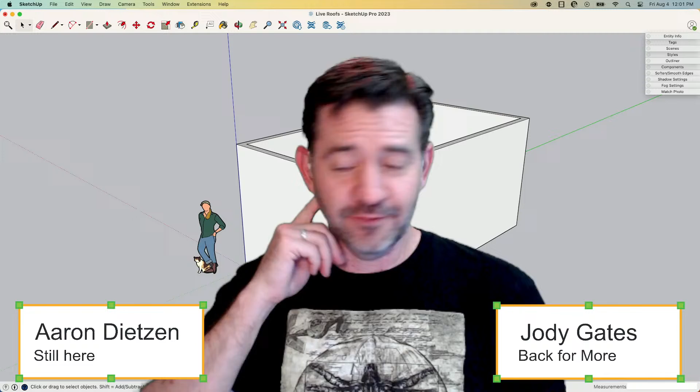Hi everybody. That's my favorite thing about remote work, the constant talking over each other. No, you go first. No, you. You'd think we'd have that worked out by now. I can't actually see Jody's face, so I'm missing half the cues of communication, only being able to hear him, just like you guys. So that's why we're stepping on each other.

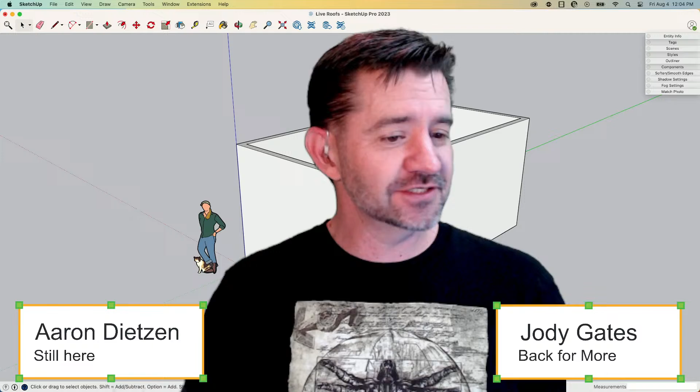I'm gonna be honest, I'm a little bit confused because I thought it was titled Pitch Perfect Geometry or modeling, and I thought it was going to be a musical show. I have all this music queued up and now it's wasted. Oh hey, you want to start singing, Jody? I'll pause the modeling, or maybe I'll just throw some out there. Let's be clear, when it comes to me and singing, Pitch Perfect is not the appropriate word choice. Jody's more of a freestyle rapper, is what he's saying folks. That's right, interpretive, I'm an interpretive artist.

All right, so let's hop in, let's do this thing. We're gonna get into this, I created some simple geometry here to represent walls, I just created a whole bunch of boxes of different shapes and sizes. Can I stop you first for a specific ask? Fire away. Peggy would like to see that shirt a little better.

There's my Vitruvian man. That work? Something about it looks like there's some motion blur around his arms, so to me it looks like he's flying.

I think the issue is it's kind of yellow, it looks like old paper, and I think the green screen is picking that up a little bit and giving me some gray in there. So there probably is a little bit of flicker around here where there's lots of lines and stuff.

But yeah, in the real world he's sitting still. But yeah, we can do that in the real fake world. That's right.

Okay, so I'm seeing mansard, I'm seeing mansard roof, I'm seeing A-frame. Randy would like to see a roof in D sharp or a G flat. Nice way to take that A to another level.

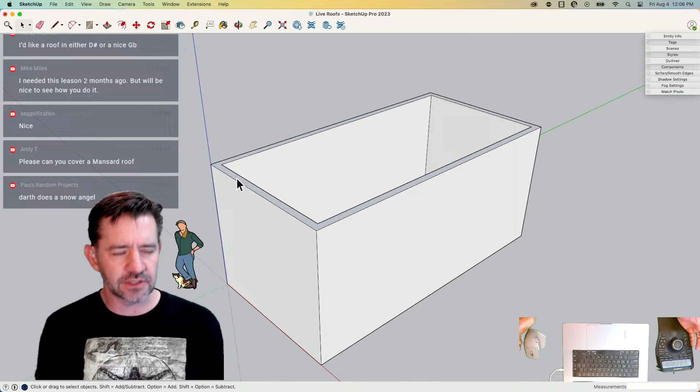Generally speaking, if I go in and model something for design or framing or anything like that, the wall thickness I will use is the framed wall. This comes from my background where it was design, so the bearing width was what I was concerned about. I wasn't concerned about the finish of the exterior or interior, where this will end up being 6.5 inches total. For me, the studs and plates were going to be 5.5, that's what I modeled at. So that's what this is.

A big thing when I go in and model geometry on top of walls, the first thing I want to do is separate the geometry, right? So right here, this is all loose geometry. You can see, pretty simple - it's just a rectangle, did an offset push pull, got all my geometry.

I'm going to grab it all and make it a group before I draw anything else. This means when I come in and start drawing my roof geometry on top of here, it's not going to weld with the wall. That's pretty much the worst case scenario - having all of your stuff together. Then when you want to take the roof off, you have to go in and pick and hide individual pieces of geometry. That's not a way to do it.

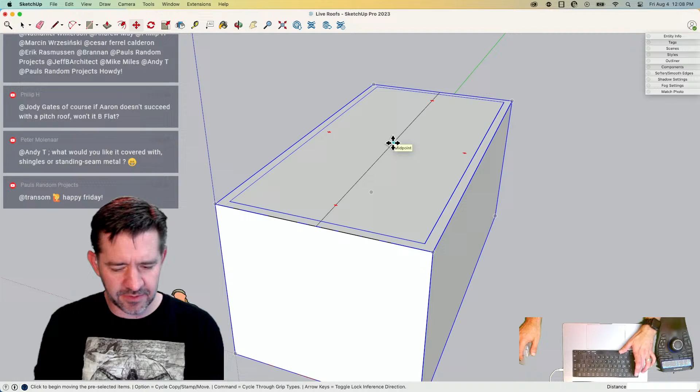The second thing, when we talk about roof framing, what I don't want to do - I'm going to pick on our own training materials here - is draw a rectangle, put a line right down the middle, and grab that line and move it straight up. We can close it up by going like this. And that's all you need to know. See you guys next week.

No. Done. The problem here is that this roof comes down to nothing at the end, right? And that's no good. No matter how I frame that - with trusses or sticks or some space age polymer, it doesn't matter what it is - if it comes down to nothing right here, nothing can't support a whole lot of load. This is not going to be a good way to do it.

So at the very least, what I probably want to do is something more like this. I would come in here - oops, missed the corner - go like that, give that some depth, probably a specific depth based on the heel of whatever member that is, if it's a stick or something like that. I think a standard heel height for a 2x4 truss at 6:12 was 4 3/16 inches.

It's extra fun when we do roof stuff since you have the background in roof stuff, so you can use real roofing words as opposed to other times where you just use a thingamajig and sound like you know what you're talking about, which is kind of new for me. It's kind of neat. I'm trying. I'm pretending. Yeah, I haven't had to make any terms up yet. I'll wander somewhere, we'll end up somewhere I don't know what I'm doing. I feel confident in that. Just less likely to - I'm going to make up less things than normal. Good. All right, good, I guess good.

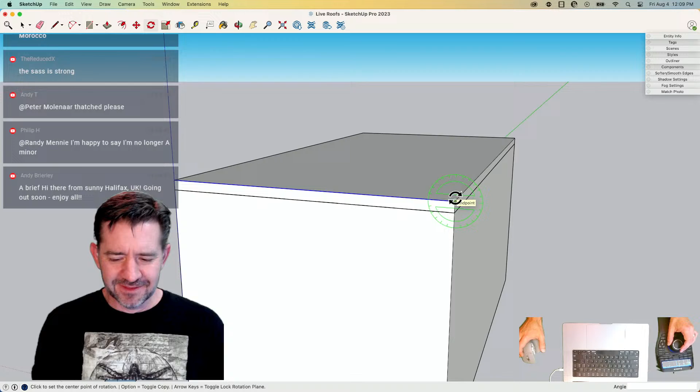So there's a couple things I could do from here, right? If I was a math guy - not a thing, not what I am - I could probably calculate what the heel height would be based on the span. So a span of 10 foot with a 4.3 heel height, the ridge is going to be a number. That could happen. I'm not that guy.

So what I'm going to do instead is I'm just going to grab this line right here. I'm going to go to rotate.

I don't know if I ever installed my keylogger. I said I was going to do that last time, but I still haven't. So I just use the shortcut key of Q to get that there.

I'm going to take this, option rotate. By default, rotate is asking you to put in an angle, pointing in the right direction down there at the very bottom, underneath my keyboard. The default it's asking for is angle, but you don't have to put an angle. You can actually put in a slope.

In the US, slope is usually rise over run. So it's rise over 12 inches - how high do I go up? I'm going to put 6, then a colon, then 12. That's going to give me a 6/12 slope right there.

I'm going to grab this guy right here again, do the exact same thing, option rotate that to 6/12, enter, and that gives me two lines that cross - that would be a 6/12, 10-foot profile.

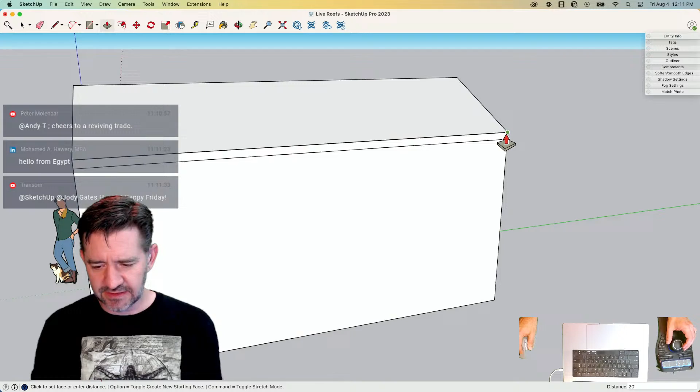If this was just a gable roof like this, I would just grab that, pull it right down like that, and that would be the start of my roof. From there, easy mode - we're done. Make group.

So that would be step one, the basics of how I would do all roofs. They would all start off with that basic set of geometry. Stuff's going to change, of course, with different slopes, and that's just going to change how far I go. I might have non-symmetric roofs where one slope's higher, but it doesn't really matter - when I'm looking at the end, it's just like that.

So the first thing that comes up is, well, what if we got a hip roof, right? What if this leans back right here? Let's hop right over - that's why I got examples, opportunities, examples for days here. So I would probably do the same thing, right?

Start with this shape, and give me that heel height. Then what I would possibly do here is maybe something like this: grab this shape right here, grab the actual face, not just the line, and I can option rotate that to 6/12.

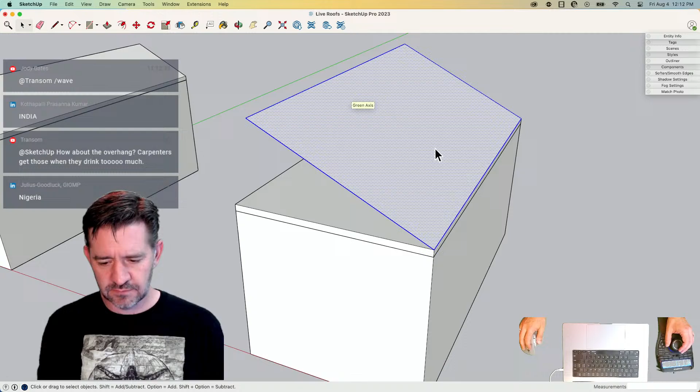I'm going to make that a group temporarily - you'll see why in a second. I can take this one right here, same thing, I can rotate that. Option, rotate that up, 6/12. And that gives me that initial geometry.

That is it. Transom had a comment about overhang - is that something you'll get into after a bit, or is there some natural part that comes with this? Yeah, we'll talk about how to add overhangs.

Generally speaking, well, I guess it depends on the roof. If I'm doing something like this, what I would probably end up doing is after the fact, come in here and drop my overhang on. So we'll come back to it, we'll do that.

For a hip roof, I guess I could do the same thing even. I could just grab this and then do the same thing - take this face, option rotate that up to 6/12. Nope, 6/12, there we go.

If I want to do all the sides, I could do the same thing. I do want to say that - oops, that's what I did, I did a semicolon instead of a colon, that's why I got a weird thing there. Something like that would work. Roofs can be messy, I'm just going to point that out right now.

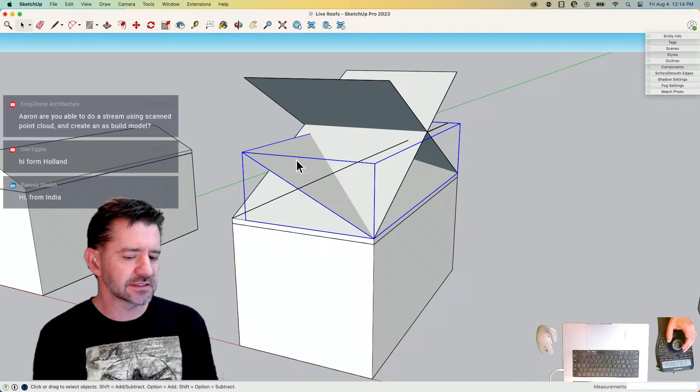But the nice thing about roofs is a lot of times you'll have the same pitch occurring throughout a building. So you can actually establish that pitch with one surface and then take that surface and put it in multiple places. That was one of the reasons I made this into a group right at the beginning - because I wasn't sure if I was going to have to grab that and copy it around. In this case, I didn't have to, so I can actually explode that.

Once that's done like that, I can do some quick intersection. Just grab all those planes, right click, intersect face with selection, and then I can just pretty much grab the top like this and delete it. And with that, you got a hip roof. So that's a way to do it.

That works really well if I have things like non-symmetric hips - so if the face is not 6/12, it's 12/12 or something like that. If I have something different, that's a good way to do it. Let's look - I am going to talk about overhangs. I want to keep going here though, because I want to show you guys another way that I could go about that.

Do the same thing here. I'm going to take this, just the edge. Transom approves of that, disappointed that he had not thought to use the rotating planes method before.

Hey, that's what I'm here for. If you had already thought of it, then you guys wouldn't need me. Aw. It's true.

So I'm going to rotate just that edge up. I'm going to find the middle of this side, drag that straight up, and I'm going to double click that and make it a group. Take that group and I'm going to stick it in about the middle. It doesn't actually matter where, just somewhere along this line. And then I can actually explode at that point. I don't need it to be separate. I just need to unstick it from the front.

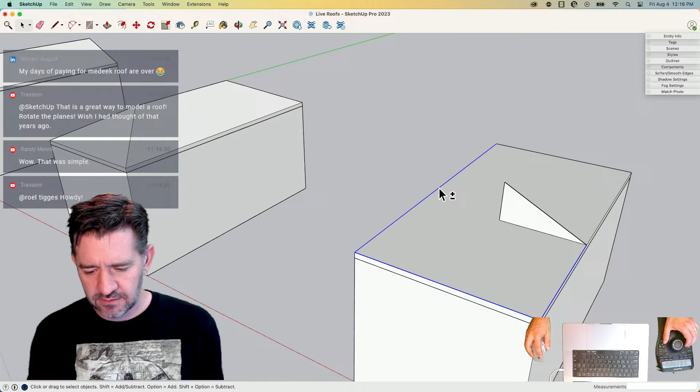And now if I grab all these edges like this, I can use Follow Me. Oh, which I haven't even added to my, oh, hold on. We got to get that up here. That's not going to work. Follow Me. I can say Follow Me and then hit this triangle, and that'll give me that same geometry.

That works really well. In this particular case, where it's a simple box, I can just take half of the standard span, model that, just do a Follow Me, whip it all around. That becomes a little more work when you have a footprint more like this, which we'll get to. But with this, yeah, Follow Me, have it go around, you're done. Make that a group. Let's back up.

You might have a real future in roof modeling. Hey. Design. Or real past. I got history. I got history, son.

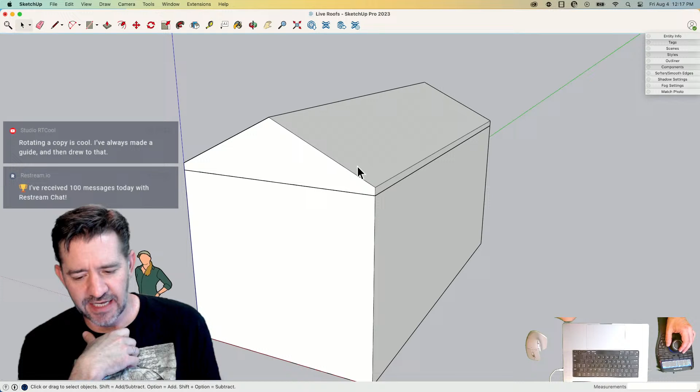Yeah, so when we talk about overhangs, it's really kind of up to you how you want to do it. Well, it's all up to you. We're just throwing out options. But overhangs can be added before or after. One of the things I run into with overhangs, and the reason I struggle with them personally, is it adds a bunch of extra geometry hanging down, and then trying to keep that clean as I model ends up being more work than I want to deal with. But we can do it. We can talk about it. Let's get into it right now.

I'm going to do this outside of context, so I don't have to worry about. Yeah, Nathaniel's on here. He's writing notes, and he's going to turn everything I do into an extension. And you guys won't have to worry about learning. I committed you, Nathaniel. Sorry.

So I'm going to do this out of context because I don't want my geometry to join. I want to create a new face that represents my overhang. So I'll come out here, come to the top, draw a line the length of the overhang. 90% of the time on the plans I've worked on, overhang is measured looking down from above, or horizontally outwards. I've had a couple weird buildings where stuff was measured on the slope, but almost always it's measured horizontally. So I'm going to type 12, put a 12-inch line in like that. So this is how far my overhang will run.

Then it's just a matter of copying this slope, going down that same slope like that. Here we go. And then depending on how this is detailed out, if I knew the fascia height, say this is supposed to be 6 inches, I draw a line down 6 inches, draw this back, draw it up, and that would be my overhang geometry.

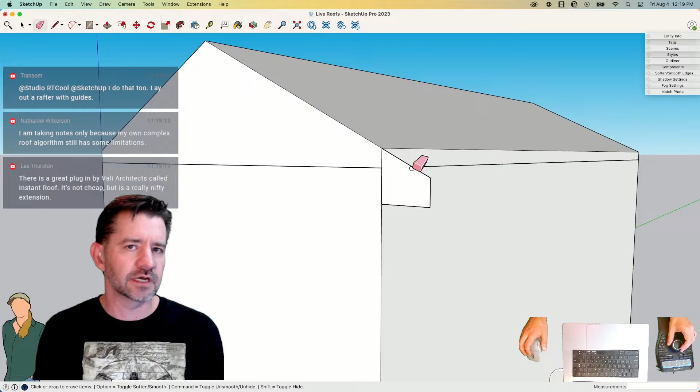If I have exposed tails, where the ends of my truss are going to show, what I could do is take this and offset. I need to offset 2 lines, so I guess it doesn't matter. I can go this way and tell that to come down whatever the board width is. So we were talking 2x4s. So if I go down 3.5 inches, that gives me that length, and I can carry that up. And that could be my geometry for my overhang. Regardless of what it is, it's just a matter of modeling it in 2D on the face first. I like that box better. We're gonna say this is what our overhang's supposed to look like.

Then what I could do in this gable's pretty simple, right? Because I could take this, I could say mirror that, copy it, the ridge. I'll give it to me on both sides, and I can just pull this down to here. Double click there. And if that looks good, I could grab that geometry, cut it, come into context, edit, paste in place, and then just do a little bit of cleanup.

These are the parallel, or the tail overhangs, obviously. Be a little bit different on the ends. What I got going on here, I don't know, maybe I got, again, maybe that offsets. Grab this and this, offset that by whatever I need.

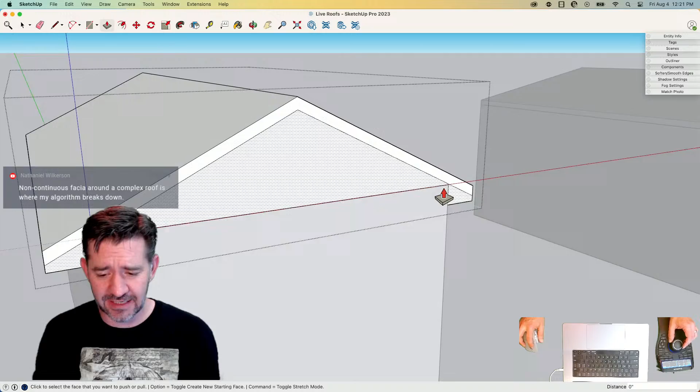I don't want to get too much into details because this is going to change depending where you're at, depending what your architect likes to call out, but I would add that geometry after. So things like the ladders or whatever is causing the overhang on the gable side, I would put that geometry on later. I'm just going to undo it all. But that's how I would go about this piece.

If I was to come back and we wanted to add, so we do the same thing here. I didn't copy that. I should have copied it. Take this and make it a group. Control C to copy it. And come out here, and V, and then we can paste that right here. Actually, what I should do is paste it in place. We'll just cut it and bring it. We'll put it in here with this. We know what we're doing now.

You don't have to worry about breaking it, right? Yeah. Knock on wood. I haven't saved anything. You guys notice that? Why bother? Yeah. Makes for bad TV.

Boring. All right, now we'll copy this around. Oops. I'm okay with it merging with my geometry, so I'm not going to worry about keeping it as a separate group or anything.

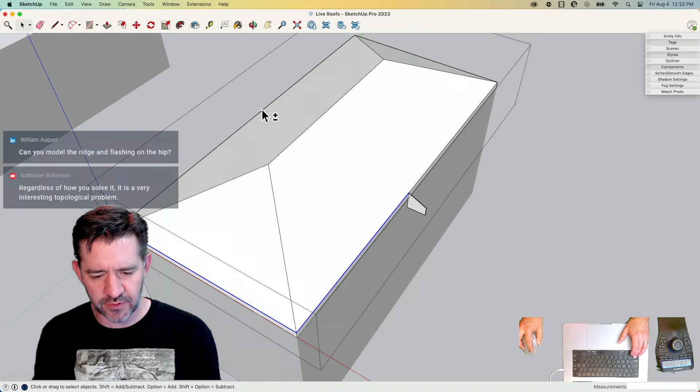There we go. So while you're sticking your tongue out and thinking about this, Nathaniel said he's taking notes because his own complex roof still has some limitations. So he's just trying to figure it out. He may not be making a new plugin, but he's at least trying to understand how to make it better.

So that got me close to what I needed. It did erase some geometry, so I would have to come in and clean that up. If you would not put it inside the group, just saying, it would have stayed outside. Yeah, we could have joined it together afterwards. We definitely could have. We could play with solid tools. There's a couple options we could have done there.

Yeah, Instant Roof by Vali Architects is a good roof tool. I'll say that there's actually a handful of roof tools out there that are good. Even 1001bit Tools has a free version that does a hip roof generator. It's a good way to get initial geometry created.

I will say that it is good to understand how to get this geometry in yourself, because every one of those tools sooner or later hits a roof that doesn't make sense, right? Or you can't quite get it to match the way it shows in the drawing. So it is good to have some tools to do that also. I'm not defending myself. I'm just saying for your own sake, it's good to learn. Yeah, you've got a good example down the line that's going to break all the things. We're going to get silly.

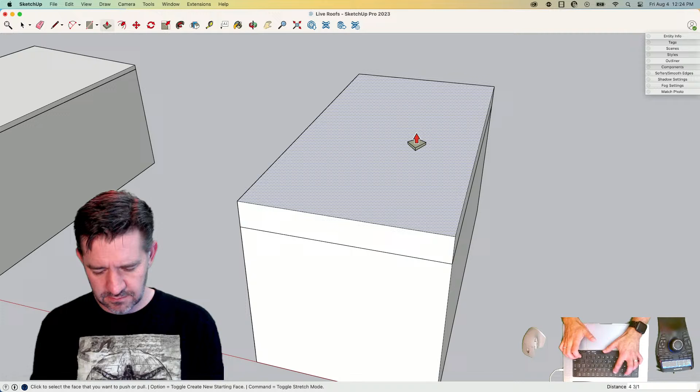Oh, yes. I'm trying to think of anything else we could show on a box like this. Oh, somebody's asking about a mansard. So I'm going to do the same thing. I'm going to offset this. All we do with a mansard roof is same thing. I'm going to take this. Rotate my planes up.

Down the middle. When we talk about a mansard roof, all we're really talking about is a hip where the face is higher up, right? So if I take this, let me do this. I'm just going to copy this plane up like this, take it, rotate it, same thing, 6/12.

And then rather than having that start at the heel right here, we'll say this isn't very tall. This is a pretty small building, so I'm going to draw a line down 12 inches. And I'll take that, put that right there. And then we say intersect with model, and then, so that's a fairly simple solution.

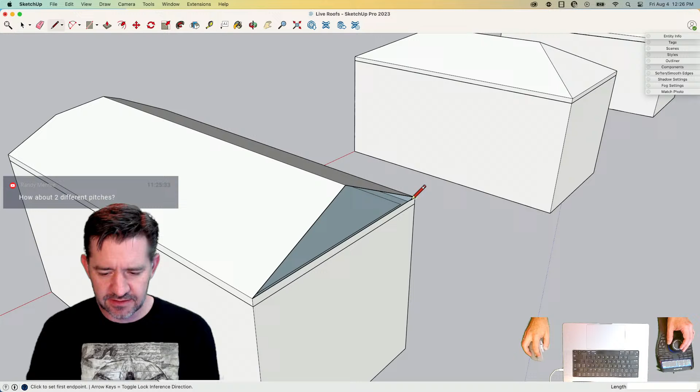Just taking that same plane and moving it up. Randy asked about doing 2 different pitches. Absolutely. Let's say that down here on this side, we take this and say this is a 3/12 down here because somebody's just a silly goose. I'll option rotate that up. We'll say 3 over 12.

I'll draw a line over like this just to get myself a plane. There we go. Intersect face with model, and then get rid of that. So just the same as what we did here. It's just when we rotate that up, we rotate it to a lower pitch or a higher pitch, whatever that is, where it's asymmetrical as opposed to this being a symmetrical pitch. So yeah, pretty simple.

So I used to teach framing and design software to people, and 3D modeling was difficult. I'm old, so I used to teach people this like 28 years ago. Dang, that hurts. Yeah, it seems to me like you probably were too young to be teaching anybody anything 28 years ago, though. I was on the young end. I was a recent high school graduate teaching software to 60-year-old engineers, and it was a situation. It was something.

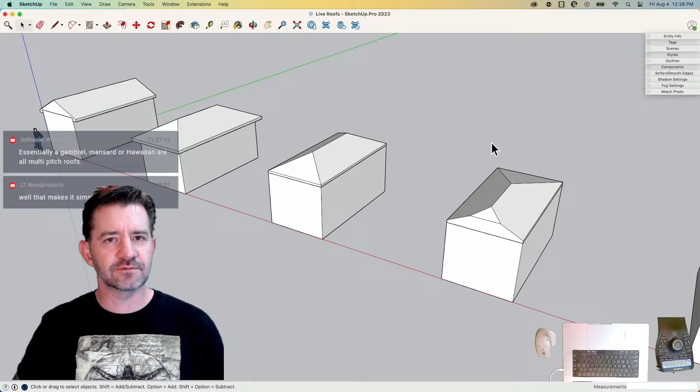But one of the hardest things to teach people in 3D, especially back then when everything was drawn in 2D. Even AutoCAD could kind of do 3D, but most of everything was laid out in 2D. So to go in and actually think of how pitches were created in 3D, it was hard to visualize. So we would talk about it in this idea of planes, having surfaces that were at slopes, and they would just go out there and intersect other pieces.

But that concept really, I think, helps to visualize stuff like this. So that's why I say taking that surface, that face, and rotating it and making it into a group so you can move it around is kind of a cool way to do it. Yeah, let's keep going. I should be grouping things. Hold on. Make that a group. Did I group everybody else? Everybody else is grouped. All right.

So Bill's wondering if the pitch angle, the 6/12 pitch angle, works with rotated rectangle. I don't know. Rotated rectangle came along after I was no longer doing this stuff, so it's possible. Let's try it real quick. I'm gonna do the same thing here. I'm just going to give myself a flat plane to work on. And we'll do some different heights in these next couple examples too.

Oh boy. Must be Friday. All right, let's try this. This is the third time. 4, 3, 6. I heard that's the charm. Friday's the charm? No, third time's the charm. Friday's when I'm in love. Okay. But that's unrelated, I guess. Well, hey, congrats on that.

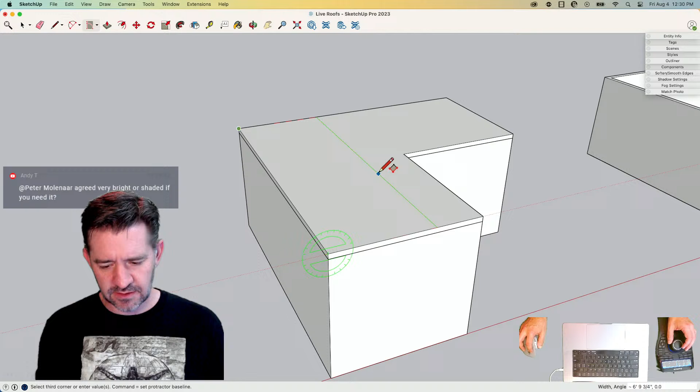All right, let's draw a shape, and let's make a rotated rectangle. So with this, I'm going to first draw my base here to here. And then I'm going to come up, 6, 12. Did not like that. So no, you apparently cannot use rotated rectangle that way. Now we know. Thanks, guys. All right, I'm going to do this a couple different ways too, because I want to look at the two main ways I did this already and talk about it.

So AutoFold can be used. If I was to draw my planes in 2D, or if I was to import a CAD file, I might already have this. So I could do something like that, and then I could grab this edge and this edge and this edge maybe, and move them vertically. So if I knew the height, I could just stretch it right up. In this case, I did, because this is a 10-foot span with a 6/12. The ridge is going to be the same across all these buildings. So AutoFold will let you do that.

And this is sort of the example we give in how to use SketchUp. Simple. We talk about, oh, look how cool it is. You drag it up there. And it is cool. And if you know exactly the height, that's definitely a viable option. I'm going to pretend I don't know that height and go about the same process we've been using so far. So I could take this one, option, rotate that to 6/12. Grab this one, rotate it again.

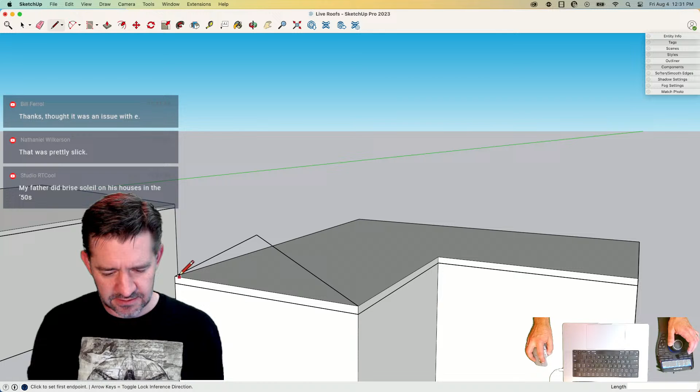Option, 6/12. And then I got this surface right here. Now what I can do is I can actually take that and I can move it with the modifier key to copy to right here, and then rotate that 90 degrees.

Now what I can do is I can take this one all the way through. If that happens, by the way, that's flipping backwards. For whatever reason, it's expecting me to pull this way and I'm pulling backwards, so it's giving me this weirdness. Tap option in that, it creates a brand new surface, and then I get what I expect. It will leave an extra piece of material between, but knowing that I'm going to come in here and delete that anyhow, that extra face under the bottom doesn't really matter.

All right, same thing here. I'm going to pull this back to here. And there's a couple ways I can go about this next piece. So I could take that and bring that all the way through to the ridge. And then what I'd have to do is draw an edge here, draw an edge here, and then also get inside here and get rid of those extra faces. So maybe either pop my head in here and start deleting stuff,

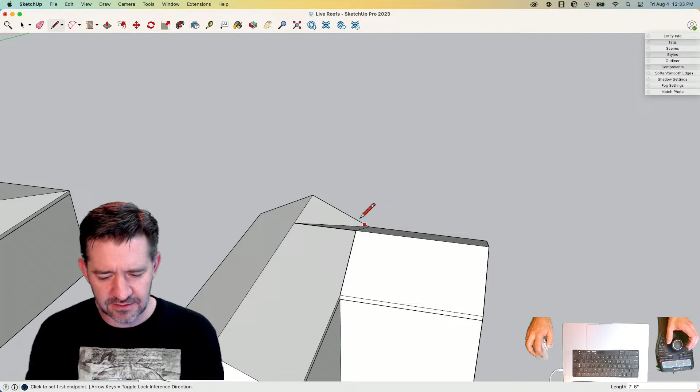or I could, if I want to satisfy that stitching itch I get, you guys know about that, how I like to stitch stuff together, I could click, click, click, click, and then erase those. That would get that for me too. But probably the quickest and easiest way to do this is to go to move and just select that point and drag it straight back till it hits that ridge.

This also works if these aren't symmetrical. So if I grab this and I'll drop it down a little bit, I can still take this and I can bring it out and it's going to intersect with the face, which is kind of nice. So I was snapping, I just wanted to point out that I don't have to snap to the ridge to make that work. I can actually have that work either way.

Now, when it gets less awesome, less good, is what happens. I'm just thinking of all the scenarios I've run into over the years and just blurting them out. So like I said, you guys got specific questions, of course, throw it out here. But what happens when your roof design looks something like this, where, you know, when this comes through, it actually ends up like that? I guess that's an option. Your detail could be this.

I could actually, I don't know why you do that, but you could. I don't think I've ever seen that before, but no judgment. Oh, you judge away. I know you're already thinking about judging. The fact that I mentioned a judgment suggests there is in fact a judgment.

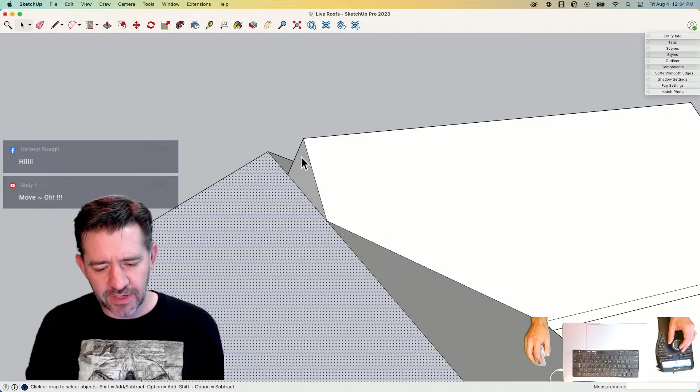Absolutely. So what I want to do in this case is I want to actually run this slope back up. So what I have to do is figure out if this slope continued as it's going, where would that intersect this face? And I'll be honest, this is where I'm just going to start getting quick and dirty, because there's probably some ways to, I don't know.

What I would do is one of two things. This would be my knee jerk, would be to grab this surface, grab it, option copy it right up to here, and then just trace that line, and then get rid of all the extra. And then that's going to give me that geometry with the overlapping hips.

This same thing is what would happen if, so let's say I come into this guy, we'll bring this down, we'll just come down 2 foot. Same thing would happen here, right? So let's make that a group. We'll bring this over here. And now we got to clean things up. Pull this.

Sometimes I wonder if the things I do cause me more work than if I had just drawn the thing from scratch. Started from scratch. That wasn't too bad. That was catastrophized.

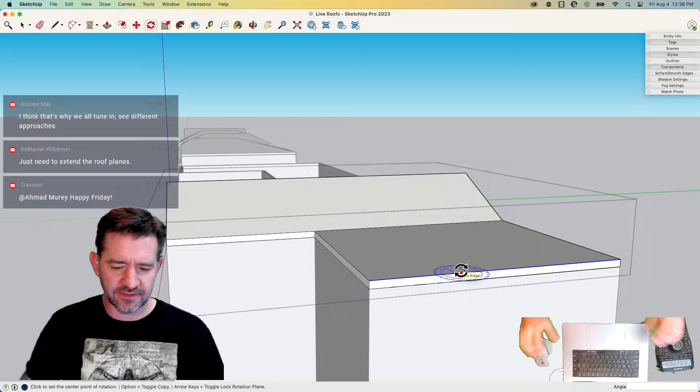Okay, so here's a cool thing though. So this right here, what I'd be tempted to do is again rotate to pull those two lines up, create that face. What I could do, I can still kind of leverage this because I can say option copy that, bring it here, rotate it from here to here.

But I can't just go grab this and scoot it over because that's just going to stretch stuff out. So that's not creating a new pitch. That's actually creating an asymmetric pitch because this is saying it's 612, and as I pull it over, that other one's leaning down. What I want to do instead is maybe something like copy that over to here, and then I can just do this. Maybe, I don't know. I feel like fuchsia lines are always the most satisfying.

They are. Yeah, it's like a superpower because you're referencing something that doesn't exist. It's cool. It's like a laser sight. Yeah. So same thing. I'll pull that out to the ridge like that. I forgot to intersect. Do some intersecting, cleaning up.

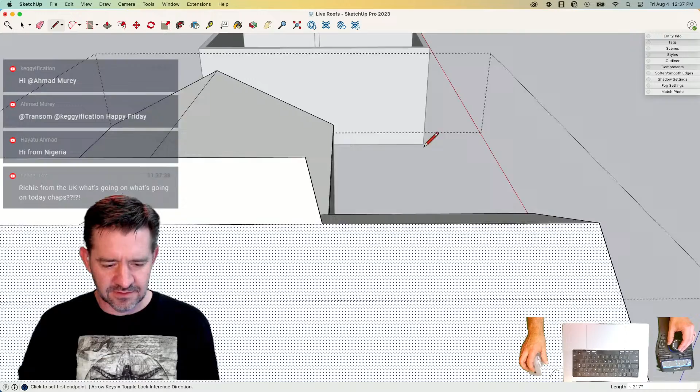Intersecting. Same thing happens here. The other thing I could do, I said the easiest thing is just to grab this plane, but if I didn't want to grab the whole plane, I could do something like this, get a fuchsia line to make Jody happy. Yay. So it doesn't really matter. That's a continuation of the plane. That's all that's important so that I can get that trace like that.

And then, whoops, too much. I over-E'd there. Yeah, so that would give me that same geometry.

You should be doing the opposite where you extend the roof line from that right face, pull it out, and then just create a fun little useless hump on it. Yeah, there you go. Yeah, like a narwhal roof. That's right. It pokes right out there. I would definitely judge that way more. Absolutely.

As you should. Whoops. I moved instead of copied. All right. So you ever done this? I've shared this tip before, but I do this a lot because sometimes when I'm designing things, my brain is two steps ahead of where I am instead of where I should be. So I will do something like this, think I copied something, but I've actually moved it. There are 100 undo steps in SketchUp. So I did maybe a dozen, two dozen at most.

What I can do is take this and hit Command C to copy it. Here, we'll do it a way you can see. Copy. And I'm going to hit undo so many times that this roof is going to fly back over to the other building. And now that that's over there, I can say Edit, Paste in Place, and it takes that copied version I made before and drops it back in. Look at that life hack. Boom.

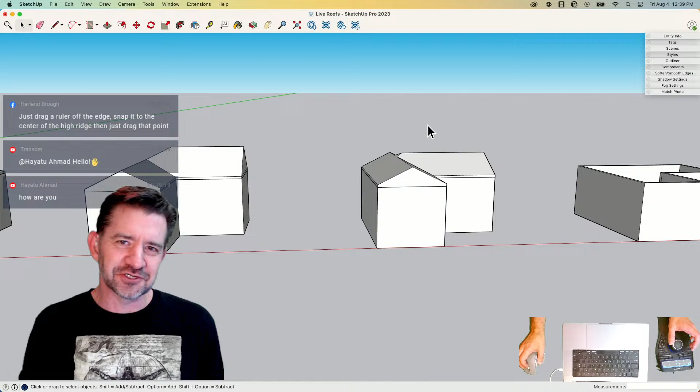Someday I gotta express my thoughts on the term life hack, because sometimes there's hacks. Sometimes it's just learning to do a thing you didn't know before. Doesn't make it a hack necessarily. But anyhow, moving on.

Cool. Yeah. You're proceeding. We're only 40 minutes into this. Are you ahead of schedule? Yeah, you guys want to just hang out for a minute or two? Let's talk about when we saw Barbie last night. What'd you think of that? Because we modeled Barbie last time you were here, right? That's right. So I finally found a pink shirt and saw Barbie. Nice. Yeah, you probably would have used some roofing techniques designing her dream house. Yeah. Basically, this is just like a repeat. Pretty much. It's all just Barbie.

I did see a question come up about this thing in my left hand that's not a mouse. This is a 3D mouse. It is from a company called 3Dconnexion. It is a tool that allows me to move the model in 3D space by turning this little puck right here. It leaves this hand open to do things with this mouse. So as a designer, it means I spend less time doing this, which I do still know. I still remember how to use the middle mouse button, which is how most people move around in SketchUp.

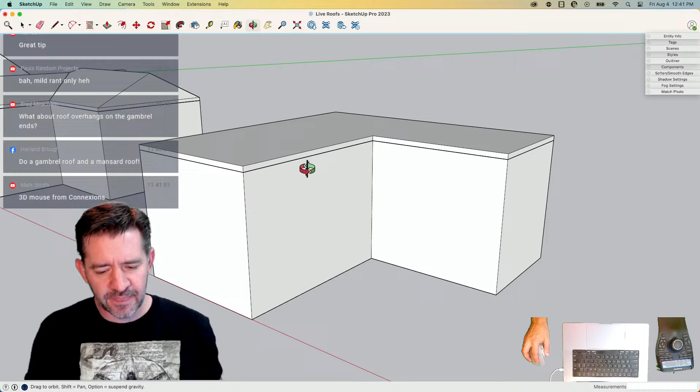But by putting it over here, a couple things happen. I'm now freed up to grab another command or pull up some information, all whilst still moving. The reason I use it primarily is in presentations like this, because I give you guys some nice, generally smooth moves. Every once in a while I panic and run into the side of a building. But generally smoother moves. As SketchUp users, we get used to this kind of thing, but it's not always the most eloquent way to present work to, say, a client.

Because my brain is connected to the fingers doing the scrolling, I'm expecting to zoom in, zoom out. If you're not ready for that, it could be a little jarring. So this is one of the reasons I advocate for a 3D mouse. It just ends up being a lot smoother, nicer. It does take some work. If you've not used a 3D mouse before and you want to try it, I recommend it. Go for it. It's awesome. But you might have to work a little bit.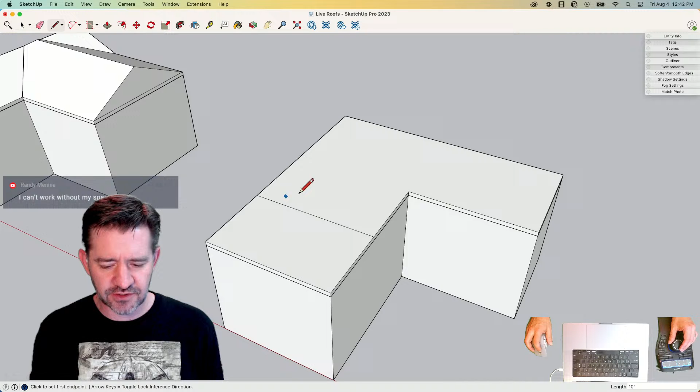All right, let's talk about hips. Let's stick a hip on here. So I did change this a little bit. I made this wing of the house 2 feet narrower than this wing of the house. So when I come in here and get my edge across here, rotate that up to 6/12, go to the middle, drag that up, and then I can grab this.

I can say tools, follow me, that shape. Same thing, and this is what I was talking about before with the overlap, because this was the full length, right? So this distance here across was the length of my profile. When it got over here, where it's 2 foot in, these top peaks run 2 foot this way and 2 foot this way. But it's okay, that's easy enough to clean up. The important part is these faces right down here, the ones that actually got created.

What I'm going to do is just grab all of this. I'm going to right click and say intersect face with selection. And then I can just come in here and delete those extra faces. And I have that hip going all the way around.

So I feel like a lot of the same technique would apply, well, not this one, but the previous roof, for like dormers. I've been sitting here for the last 10 minutes trying to remember what the word dormer was. Pulling that ridge back is the big part of the dormer, getting it to tie into the main roof. Other than that, dormers, I'll be honest, the tough part about dormers is framing dormers, because it's a hole in the roof. And as soon as you put a hole in the roof, stuff's just not good in general.

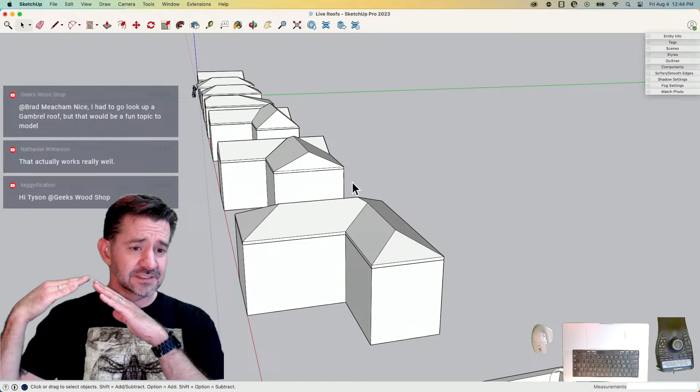Tyson just chimed in that he had to go look up a gambrel roof, and it sounds like now he's going to model something with a gambrel roof. Hey, cool. I'm pretty sure he just committed to that. Absolutely, that's what I heard. Come back next week when Tyson models a gambrel roof.

What I would say if you're in that situation is do this first. Get your hips in there, because it's real easy to come into this roof, grab this point right here with move, and just pull it out to the end of the wall. And now that went from a hip back to a gable. So pretty simple, really not too terribly complicated.

All right. 1, 2, 3, 4, 5, 6, 7. Yeah, we're rolling right along.

So as we're talking about these, this is great for the outer shell, but did you do one where we talked about making trusses, or is that even worth doing, or is that something you send off to someone with specialized truss making software?

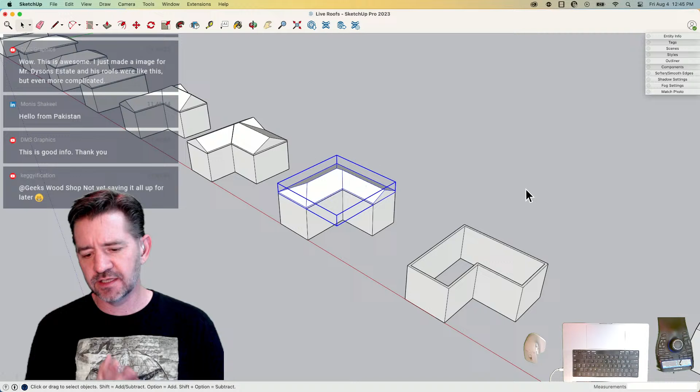Well, honestly, depending on your position, if you're in the position where you're just doing design, I should say not just like let's just design, like you're just a little designer, that's not what I meant when I said just. I meant not responsible for the framing that goes inside. Then I would say don't worry about it. There's some cases where a designer will have to worry about the truss framing because they have to support girders in the roof or something like that. So specific locations or knowing where something is at is very important.

If that's the case, then go ahead and lay them in. But the process of actually creating the 3D trusses or details on how the truss is put together probably isn't necessary. So you could maybe even do a 2D layout with rectangles. The reason I say don't bother too much is if you're working with a truss manufacturer, at the end of the day, they're responsible for the truss package and making sure it fits on the roof, and they're going to design it anyhow.

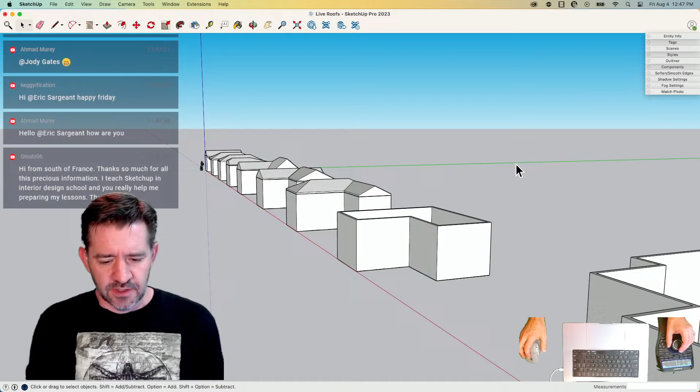All right, I guess I got on a soapbox here. Sorry about that. Just trying to save you some time.

No, that's good. And it's funny because whenever I designed my shop, which is timber frame, I sent my design off to the timber framing company, and then they did exactly that. They're like, well, that's great, but here's me doing it a different, better way. It's what's going to happen.

All right, let's talk about this. We're doing all these little cases so that when we come over here to this big footprint, we'll mess it all up and try to make a roof that works. So this is one hour of education. We'll still have a good half hour of Aaron suffering through something that he probably should have planned for in the beginning.

Well, at least it's not Tyson suffering through that stuff. He gets way more flustered. I got a couple years on Tyson doing this, that's all, doing it live. So with this, he hides it well. Well, he's also got Matt there to make sound effects so you can't hear the sweat. Oh, that's true. Yeah, all right, so sweat. To do this, great phrase.

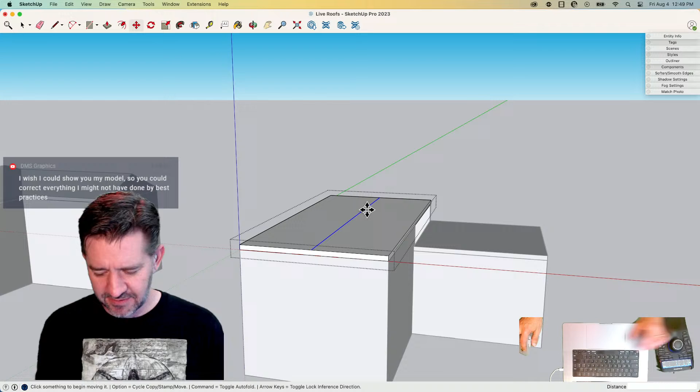I'm going to again create my base geometry, the heels of whatever framing members they are, at two separate heights. What I'll probably also do is group these separately temporarily, and I'll show you why. Over here, I'm going to take a shortcut. We've done this enough times that I'm not going to rotate stuff. I'm just going to grab that and move it up to the peak I know exists right here. All right, so that's what we got there.

Down here, I want the same exact slope running into what's over here. So I'm going to copy this, Command C, come in here, Command V to paste, put that right here just like I did before. And then I can pull this back to here, so that comes up against the edge. Look at that, so close. Right there it ends. So now, even though these are two separate groups, I can still inference where the two lines meet by using the intersection from here to here to break that, and then use move on this point to pull it back until it hits that roof. And there we go, that is how that would tie together.

At this point, if I wanted to, I could leave them as two separate roofs. I could make them into one group, come in here, and then check if they're both solids. Nope, something's not solid, so that's okay. I could take both of them, explode them, and then clean them up as needed, but yeah.

Pretty simple. I think a lot of times what happens, this is my thought on how people see roofs: they see these cut up shapes and geometries and go, oh, I can't make that. That's totally understandable. But what you can do is break it down into these instances, one at a time, model them, and then figure out how they hit together. You can do that. I have faith in you.

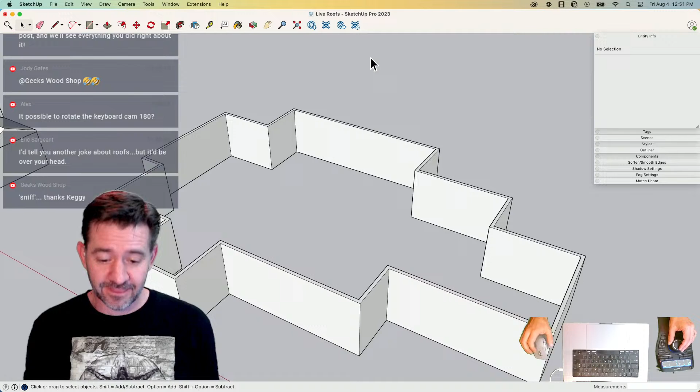It's you'll be happy to know that Eric has showed up and started dropping roof puns, and I'm not even repeating them for you. He did threaten to step on your pun game, so punny guy. He's definitely bringing it.

I'm going to call out how blown away Andy is by the idea of grabbing a point and moving it, since he's always just grabbed lines or faces. So you earned your keep with that one tip, at least for Andy. We're 50 minutes in, let's call it then. I have a feeling I'm just going to go downhill from here. I feel like the going downhill part is actually the funnest, like a roller coaster. Going uphill, boring. Going downhill, yeah.

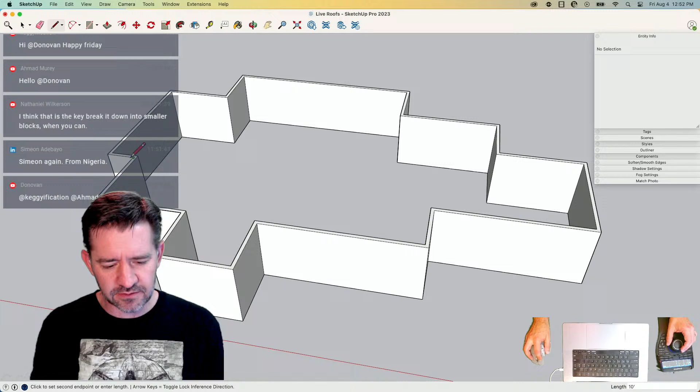All right, let's take a look at this thing right here. This isn't a specific house example I have, it feels like the profile of a building I would have seen in Colorado and been asked to put a roof on. So we're going to go for it. I don't know what this actually looks like when we're done. I'm going to start the same way, trace it real quick to create a single surface. This is all one height, but as we were talking about, we can make multiple instances of this and get messier and scarier and stupider as we go.

I did see some good-looking roof jokes. We should talk about this, it's something we talked about earlier: the term roof versus roof versus roof. Is it roof, or is it supposed to always be roofs? Whenever you roof, that is the act of roofing, right? Roofers roof for a living, or do they roof, or do they rough? Yeah, it's an annoying word. It's tough, I know this. Roof versus roof, almost rough, is a regional thing. Some people really get into that double O, whereas others almost turn it into a U with a roof.

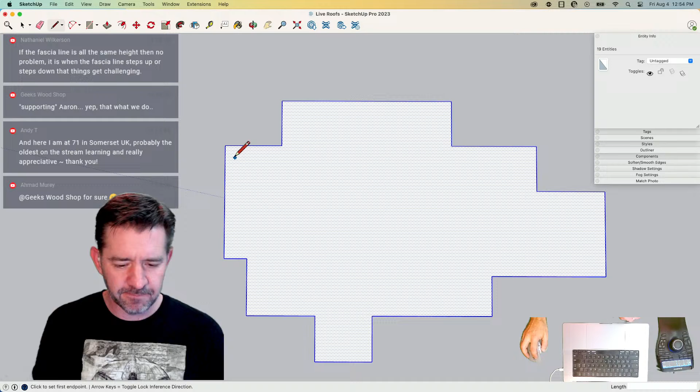So with this I want to do a couple things. I'm going to take this and slide it over here, scratch pad, graveyard, whatever you want to call it, this is where it belongs. So what can happen with a standard roof like this? Let's say this whole thing is hipped, we just have the same slope coming up off of every single face. What will always happen in that situation is...

Any two faces, if they're at 90-degree angles, will always meet at 45 degrees. So what I could do is take this edge right here and rotate it to 45 degrees. I could do the same thing here, take that to 45. And then I could take that edge right there and put that here. Oops, I should turn on stamp.

Do you have a specific target of people that say rough? Randy thought you were targeting Canadians. Oh, I'm from the Midwest, so I'm not that far from Canadian myself. As far as talking, we like our vowels just as much as any Canadian. Most of my family calls me Aaron, so go figure that out. My wife is from the Midwest, and when we were courting I was talking to her in front of her mom about going down to the pond, and her mom stopped the conversation, like 'Pond? You mean pond?' I'm like, I'm saying it the right way, I may be from Oklahoma but I at least know how to say that word. Maybe that's the thing you guys have learned.

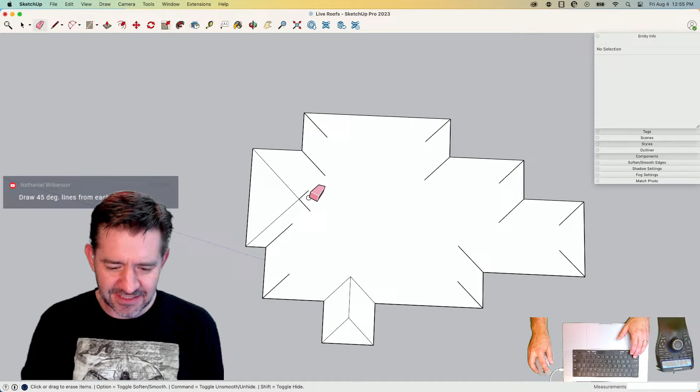I'm really hoping you're going to connect these lines, do an autofold, and it'll be the most amazing thing I've ever seen. Well, the problem with autofold on this is that each of the ridges is going to end up somewhere different, so unfortunately it's not going to be that simple. But damn it, yeah, sorry, alas. But this right here, my friends, this is how designers used to have to do this sort of thing, and yeah, it's rough. It's rough, you mean roof? Oh, wheels are coming off already, huh? All right.

So I'm just doing this to get a quick inference, we'll try pulling it up. Like you said, we'll grab the ridge lines and start moving them up. But the problem, I think what we're going to run into pretty quickly, is the fact that it doesn't know where to break or fold. They're all going to come up at different heights and edges. When it works, autofold is arguably one of the most amazing things SketchUp does, but as you're pointing out, the stars have to align.

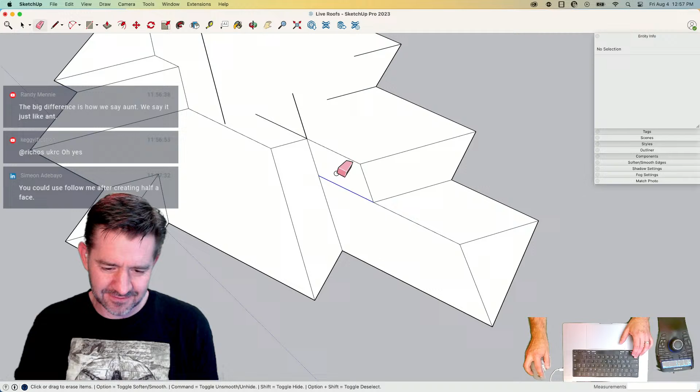This is gonna come back like this. This is gonna come up here. This is gonna come back down here. There we go. Okay. So this is legacy roof design. But each of these corners, like I said, will come out at 45 degrees. And realistically, anything that's lining up perfectly and hitting like this is only because I drew my lines in 2-foot increments. So that is what that roof should look like.

And I'll be honest, I can't teach you how I did the things I just did, because that's just from years of looking at roofs. So unfortunately, yeah, no, I got lost 4 times as you were going to set up a next line. I'm like, wait, where's that one go? I can't tell you what I did. I mean, some of that was just instinct.

So if I grab that right now and I try to move that up,

Hey, nice. It's an interpretive piece. This building was in Dune. I remember seeing it. It was towards the back, but yeah.

So that doesn't work. But what that does do is gives us an idea. This would be the kind of thing that we would receive potentially with a plan. So if I was modeling a plan that already existed in SketchUp, I might have a roof plan that looks something like that. I think one thing that's going to fail with your autofold is all of those peaks are not the same height. Right. Yeah. These two are at the highest, and then drop down below that. We got this one, then this height, then this height, and the lowest is this height. So all of that stuff is not there.

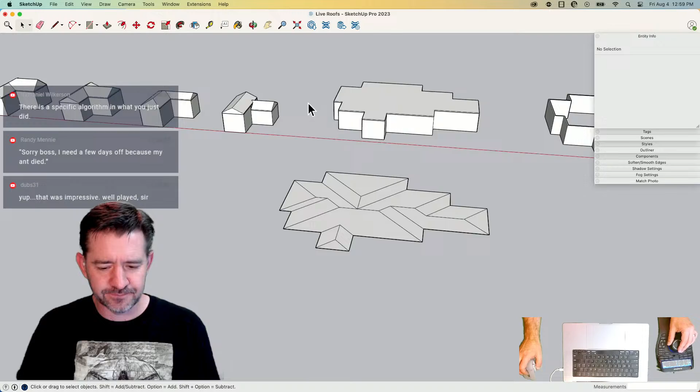So there's a couple things we could do here. We could try a couple solutions. Nathaniel said there is a specific algorithm in what you just did. So I don't know if that means he's actually applied it or managed to reproduce it, but that's kind of cool. Yeah, it's all geometry. In theory, it's all math. I'm not going to claim to have done the math. I did the geometry. I can do pictures and shapes pretty good. When he says algorithm, then math comes into my head, and I get scared.

So if I look at this, the main body of the roof. Okay, so again, I'm going to make this a group. We start thinking about roofs. The main body of trusses would be right in there. That would be a big hip roof. And then all these other pieces would be little chunks that are framing up on top of it. So as I look at it, that's the main span. So if I wanted to create my triangle like I did before and do a follow me all the way around, it would be halfway between this line and this line. So that would be this. I would take that line right there.

Like I said, I apologize. Some of this is unfortunately something that takes a little bit of time to learn. But looking at that longest span, this doesn't have to be perfect either. We'll see how this could be messy.

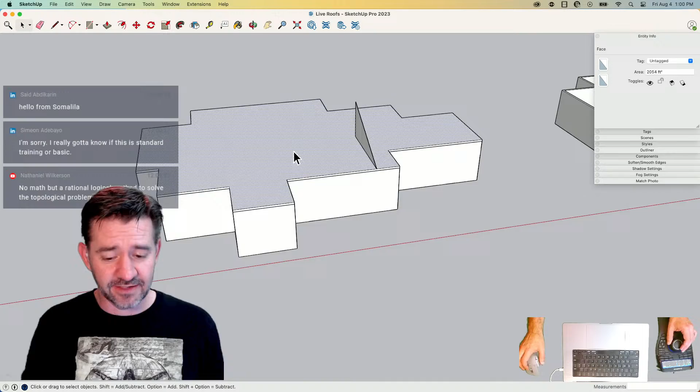Something like that. I saved this model once earlier, but I'm surprising myself in the fact that I still have not saved this again. Or you're tempted to just not save, period, aren't you? A little bit. Just as a rebellion to the system. I just kind of don't want to save, but I did. So those of you who were out there pulling your eyebrow hairs out in anxiety, I did it for you.

So if I take that outline, I say follow me and click this, I get this, which looks a little yucky, but this actually turned out way cleaner than I was expecting. This actually has everything I need to make this roof finalized. So what I would do here, I'm going to undo that. I'm going to take all of that.

Kind of like Tyson, but a little more organized. I've seen him. Okay, sometimes I've seen him be organized like this. So I know he has the capacity. Probably somebody in our team harassed him earlier that day. That's probably why that's happening.

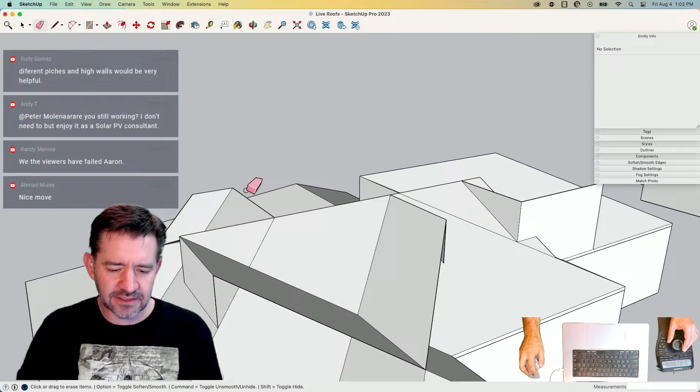All right, so then what I can do is I can come in here, grab all this, right click, intersect face with selection, and then it's just a matter of, it's kind of like trimming, finding the line to erase downwards. So I just come at the top. So anything that's sticking up above the roof like this, I know has to go. So just kind of spin around. Erase, erase. I'm not worried about these lines that are on the surface yet because this stuff pops up.

This pops up. So Tyson is here, and Tyson did acknowledge that shots have been fired. Oh, I think Eric, who's on our team, also one of our live modelers, said he would show up, and I think actually it's Tyson first. He said I'll show up and throw a little shade or something like that, and Eric said, "Well, I'll show up, but I don't know I'll be able to harass you too much." And I said, "It's okay, Jody's back. I got enough harassment. I don't need more help."

All right, so with that, deleting all the pieces that are sticking up high, now I can just come in and delete the edges that are left on top of the geometry like this. Well, this was so easy that you might have to actually respond to some of these requests that are coming in now, which is different wall heights and different roof pitches. Let's do it. Let's do exactly that. All right. I'll just delete this. We'll start over.

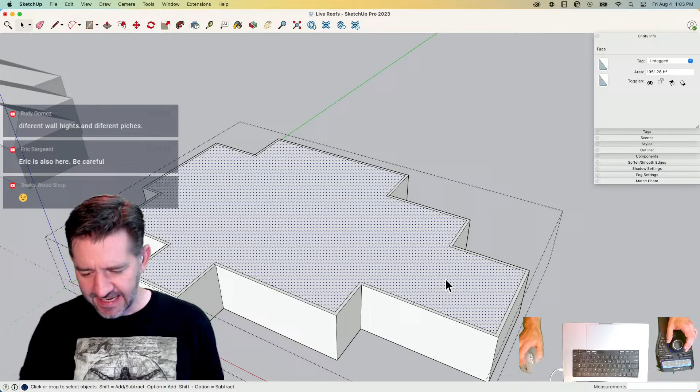All right, let's talk about some things that happen in this kind of stuff. I'm going to break this one here. I'm going to break this here. Let's say this whole living room drops down. All right. So with that, I got some breaks. And then maybe see this front entryway. I'm just going to push this up like 2 foot. I'm going to drop this guy down like 4 foot. Maybe this is like a way lower roof, and then this guy will come down 2 foot. All right, something like that.

Process is pretty much the same as what I did before. I'm going to start with some rectangles. Where's the bottom of my truss going to sit? I'm going to have one there. Have one here. I'm going to have one. Nope, missed it. I gotta come in here and clean this line up. Probably have others like that. Yeah. Oh man. Okay, feel good again. Rectangle here, and then my last shape is going to be the main body of trusses.

That'll be here. One of my main roof stories that I have to ever retell is I have a friend who some years back had the luxury of getting to have a house custom built to his specs. He's just an average person like me. He didn't have a whole bunch of money, but he had in-laws who did, and his mother-in-law was constantly offering different feedback. So they designed the house, and whenever the trusses showed up, they had not done the pitches quite right, and the pitch was not steep enough for her. It didn't look custom. Put that in air quotes, because apparently you have to have a slightly steeper roof pitch if you want your house to look properly custom. And if it's not steep enough, your house is just basic. I mean, it's off the rack.

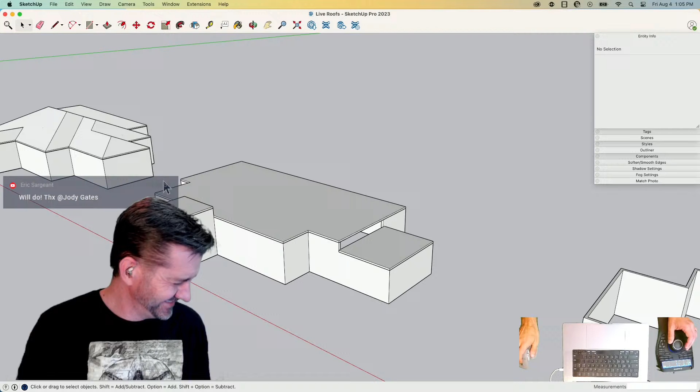What is that, 4/12? Exactly right. Every time I think of his house, which is an amazing house, I just think of the non-bespoke roof pitch. How laughable! He's the laugh of the town, of the neighborhood. Yeah, that's pretty funny. The things that make something special, you know, it's amazing.

All right, so again, I'll just come back to the same thing. It's just a matter of breaking everything down. So in this case, we see this again. But my personal history with designing roofs or buildings in general was a whole lot of mountain homes, all custom, like you're saying, Jody. So there's some stuff they would do. Entryways that were pushed up several feet above the main house. Stuff like this where maybe this drops down to a basement, but still has a 20-foot ceiling. Where we'd have these steps, or even the whole building would step in some cases.

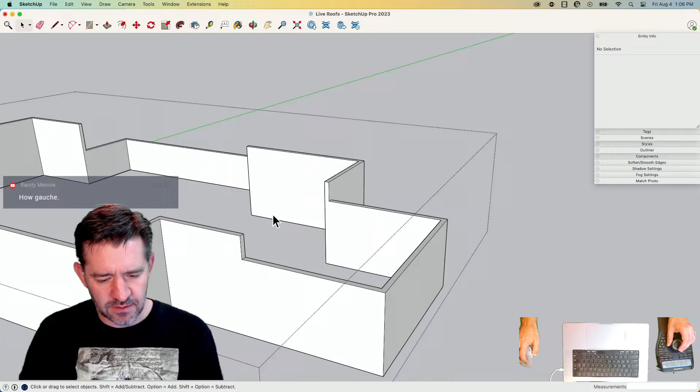Actually, let's do that. I want to do that. I'm gonna come in here. Let's say this steps down. Also, let's just get truly silly. So push this down another foot. Drop this. Why would you do a little step like that? I don't know, because you can afford to. But yeah, let's. Cool. So we'll have multiple steps in the roof here.

All right. Open courtyard in the center. See, that's something I never designed for, because a mountain house is like 75% of the time you're there, you're inside. Yeah, and you don't want to end up with a big pile of snow in the middle of your house. Doesn't work well.

So right. Nathaniel, I'm just gonna read what Nathaniel said here, and then maybe you can process this. The situation is where his own complex roof algorithm has some limitations, but note the fascia lines, even as they step up or down, will eventually all return to the same point. I don't know if he's responding to someone else or just observing what you're working on. Yeah, at the end of the day, as long as, with these steps, everything ties together at the end. So sometimes what will happen is something like this.

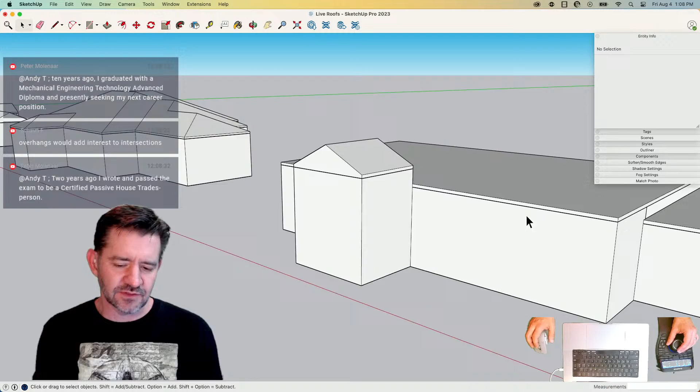I think this is what he's going for, is you'll have a situation like this where it'll step, but then they'll change the overhang length. So the end of the fascia, the face that ends up on the outside, will all be the same, because they'll extend the overhangs or change the pitch or something like that. Yeah, there's definitely ways to make ugly things less ugly if you need to.

All right, so I'm going to make this one group, break that apart. I'm going to say this is just a hip that's going to wrap all the way around. So I'm going to do the same thing I did before, line straight across. I'm going to grab that, and we'll say the bulk here. We'll go a little higher because we got the money to do it, right? So we'll do a 10/12 on the. Actually, generally what would happen is the big trusses might have a lower pitch, and the ones coming in will have a higher pitch, because then I can keep the height down.

Trusses, when they go places, they usually go on a truck. Anything taller than 13 feet has to get capped and broken into smaller pieces. So maybe this would be like, we'll just get stupid. Let's try 10 over 12. See how tall that is. 12'6". We're golden. All right. And then I will take this again. Follow me. There we go.

Looks sweet. Grab all of that. Intersect face with selection. Delete these extra. Whoops, I deleted too much. I have said too much. All right, there we go. Get rid of the extra lines in there. All right. That main portion of that roof is done.

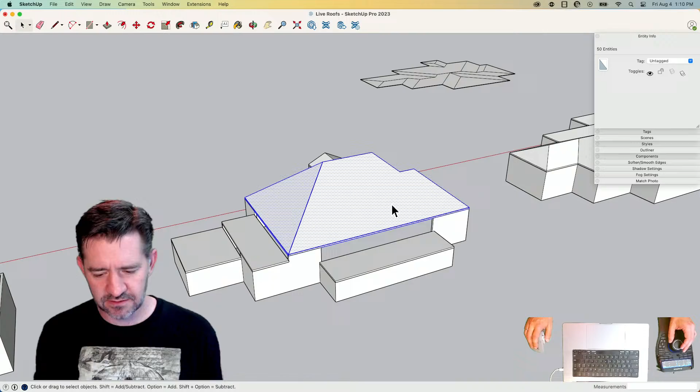Make group. All right, and down here, let's go ahead and let's take this and just have like maybe we'll go 12 over. Oh, sure. Let's say 12/12. Let's go real high. Woo. Maybe this is going to be stick built or something. Yeah, we haven't really touched on A-frames, which we mentioned at the beginning. So there you go. Look. Did it. Oh my goodness. That's something.

That, and then down here, I'm going to say that what we have is like a hip roof and then a hip roof. So stacking hip roof. This hip roof will go in that hip roof, that sort of thing. And I'm going to do that very similar to how we did the rest. I'm going to come right here, grab this edge, bring that up to, we'll go back down to our standard, oops, 6/12. Bring that up to here.

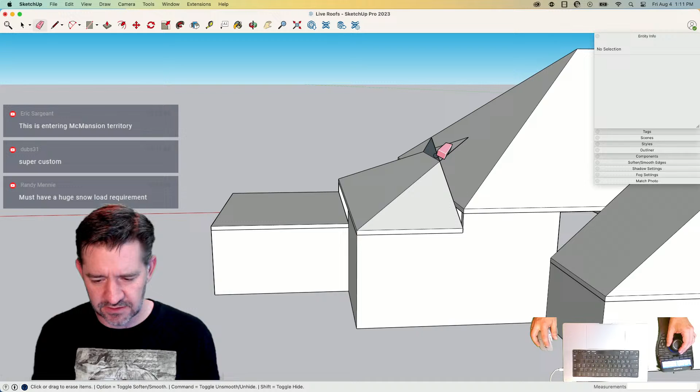And then I'll just grab this edge, and this edge. And just with those three edges, I'll say follow me, and that'll give me that hip coming right up against the edge. And then, actually, you know what? I'm not gonna mess with any geometry yet. I'm just gonna grab that, make it a group, and I'll do the same thing down here. This edge. And then same thing. Just grab these three sides.

1, 2, 3. Oh, wait, before I do that. Oh no, I did group that. Okay. I couldn't remember if I did that. I know it was the last thing I did, but I already forgot. He'll group stuff, but he won't save. Fine. All right, now I did everything. Hope everybody's happy. All right. Nothing can go wrong. Nothing could possibly go wrong.

So at this point, you know, this is not good looking. This is not attractive, but let's work into blending the roofs together. So first thing, oops, we'll start with this one. I'm going to go turn my hide rest of model off. And then again, like I was saying before, I'll draw a line right here where it intersects this above roof. And then I can use move on this point to just pull it back so it hits the roof.

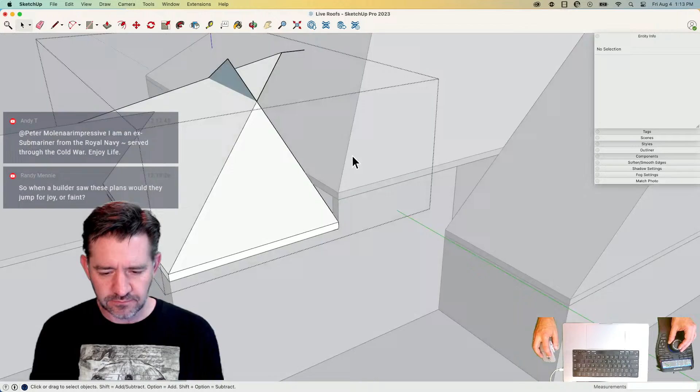There we go. The reason I left this one is because if I cut it off, it would break right here. But I don't actually want to do that, because what I want to do is come to this point and take that point straight back till it hits the roof. And then from there, I'm going to come back to where it hits here. So this gets a little weird because I have an odd slope. See, that's not symmetrical. If it's symmetrical, I could follow this and just bring it back down.

Since this one isn't, I need to figure out where this plane will intersect. The easiest way that I can think of is tie this back to here. That'll give me a plane, and then I can just kind of trace that face like that. Get rid of that extra.

Randy asks a really good question: at what point in this design does a builder jump for joy, and at what point do they just pass out? They just faint. Yeah, look at that. Oh, that's something. It really is.

Ooh. All right. This guy right here, of course, is the simple one. Because it's higher up, it's going to hit higher on the roof. So I'll do two things. First is we'll pull this back. Actually, no, I can't do that. I got to do move. I can't push pull because push pull won't intersect with the face like that.

There we go. And then probably do something like this. Break it like that. And then take that guy back till he hits the roof. And then one more move. Take the peak back till it hits the roof. And then that gets my everything intersecting back into the geometry. Good to go. And this guy right here, despite being the biggest, is the simplest, because all I got to do is break it right here.

Grab that. I like the idea of that not actually connecting and just being a facade, you know, like an old movie set. Hey, I mean, you might have some indoor pooling. Like a little snow trap right there on the roof, but it is possible.

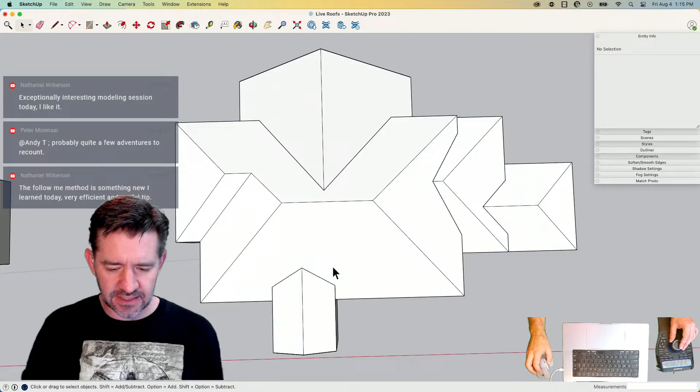All right, so that is solved for 1, 2, 3, 4 different heights and 1, 2, 3 different pitches. That's how I would go about that. Again, it's a matter of breaking it down into smaller pieces, creating that geometry, and then putting it all together. The part that gets tricky with this, I shouldn't say it's tricky, but putting my overhangs into this, because that does become a little bit more work. Let's take a look at that.

Excuse me, because I want to take a look at something else. So let's go ahead and get an overhang on here. Again, to draw my horizontal dimension, we'll say it's 12 inches again, and we'll drop that straight down, and then I'll come here, get my fascia height, and then draw that line back and up. And that gets me, there's my little box overhang.

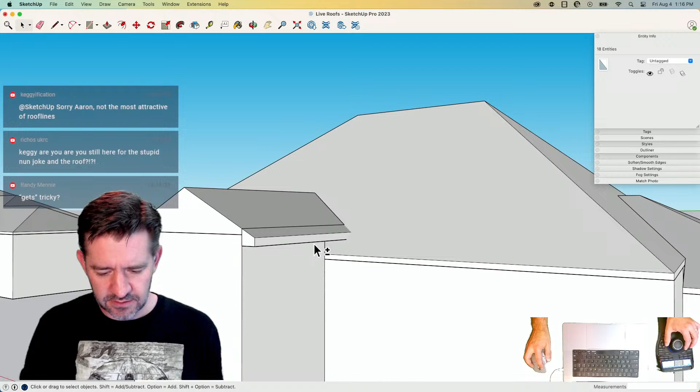We'll mirror that over to the opposite side, and then I can grab them, push pull, and then I'll get this sort of thing going on, because that's where it disappears into the model. So I can triple click, intersect face with model, and there we go. I got those two pieces. I'm going to cut them, come into context, edit, paste in place.

That in context, out of context thing, that's up to you if you want to mess with that. You don't. That's not a requirement. You could do that however you wanted to. Like I said, I just like doing it because then I'm not committed to making that geometry part of the big model until I'm ready.

From there, let's go ahead and go to edit. I'm sorry, view, component. I still haven't mapped Hide Rest of Model yet. I needed to get that done. I can delete these extra pieces. And depending on what the model's for, I will sometimes spend stupid amounts of time cleaning up geometry so I get solids, which is totally unnecessary. But I 3D print too much, so that's how I think about everything. All right, let's keep going.

Generally in this case, I'd probably work my way up the building. So maybe I'll come right here, do this guy. We have a flat surface to work on right here. So let's do it in context this time. Come here, come across 12, carry this down here, get my fascia in there, back and up. There's my shape.

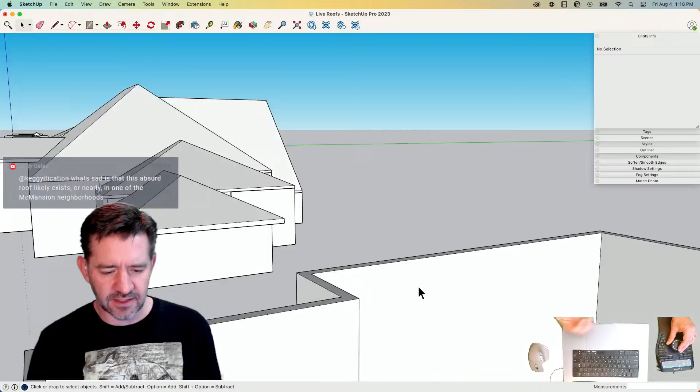And then what I could do is I could actually Follow Me the way you're not supposed to. Bring that around back to here. I say not supposed to, a little tongue-in-cheek. You can do that. It doesn't always work well. In this particular instance, it's going to be fine. It's going to be okay.

Same thing here. This one's going to end up a little bit different, but I could do the same thing. Come over 12, drop it down, follow that till it hits, come down 6. My box, and then I'll just do the same thing.

This one seems to be a little different because one of the things that's going to happen here is that roof is going to go inside of this roof. So I may actually want to come in here, grab the planes that are going to be affected by that.

See, I'm doing it again. Really worried about making this solid, and I probably don't have to be. I know I don't have to be, but I'm doing it anyway.

Thank you for doing it. I'm sure there's somebody who's real OCD whose itch is being scratched right here.

All right, you're welcome. So if I do a group select like that, that grabs all the planes that intersect with that other roof, except for that one. I don't need that. And I should be able to right click, intersect face with model, not context or selection, but model. That's going to look at everything and see where any of these planes hit it. And that'll give me that intersection right there.

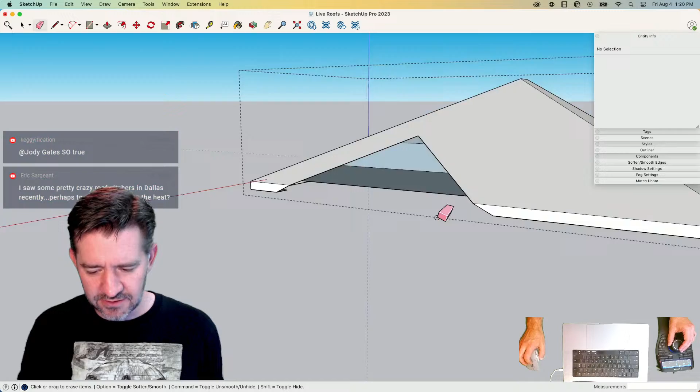So what I could do here, some of this may be above and beyond. Some of this might be a little extra modeling that's maybe not necessary. But I could. So now what I want you to do is take this into Sefaira and check out the energy efficiency, like how good or bad this whole design is for keeping your house hot or cold. Let's assume it's just good. Goodish. All right. So something like that, maybe.

So I would have to include a couple extra lines where that comes up on top. I gotta get the shortcut key mapped because this is bugging me. Like that, so we get that intersection. Looking good. All right, this guy's super simple, right? Because this guy right here, he's just gonna go over 12. Granted, 12's a longer overhang when you're twice the pitch.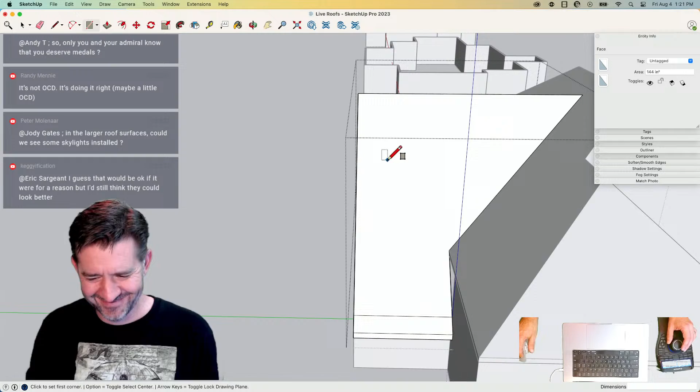Peter has an interesting request here. On one of these larger roof surfaces, could you add a skylight? Sure, because let me show you what a skylight looks like. I mean, it could just be a hole, right? There we go. Yeah, from where we are at, where we're just blocking in geometry, it's pretty much that.

Let me come back to skylight. I'll talk about a skylight in a minute, because the thing about a skylight, the difficult part becomes the shaft, what happens inside, which really is more of an issue when it comes to framing. It's pretty easy to drop a hole inside of SketchUp, but we'll talk about a couple different ways we do that. All right, last one is the main roof, and here's how I would go about this.

Actually, I would do this separate. I would not do this as part of this group. And I'll show you guys exactly why I say that. So I'm gonna do the same thing, come over 12, drop down, come up here, and then go fascia, box, created.

So what I might do here, hide these guys, and then I wonder if I could do a push pull around the whole thing as opposed to pre-selecting. Oh no, because edges have to be in context. Circle with a line through it is saying no. Yeah, that's what it's doing. All right, I'm gonna hide the rest of the model.

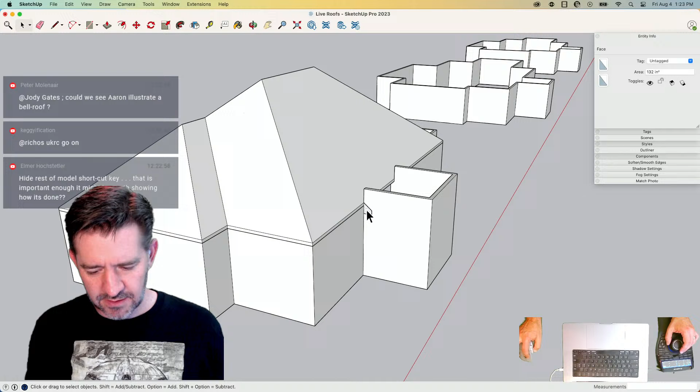I'm gonna grab this face, copy it, come in here, and double click to make this a group. Go into that group, say edit, paste in place to give me all of that, and now just click follow me to this. I don't actually need that inside there. So that gives me just the fascia.

So here's a teachable moment. Elmer is requesting that if the hide rest of model shortcut is that important, maybe you can show us how it's done. Absolutely. Why am I beating my head against the wall right here? I don't know. Well, adding some of those shortcuts, like the ones where you've got to have the right tool selected at the right time, it's never a bad thing to show how to actually accomplish that.

Absolutely, yes. If I come into shortcuts, I can find hide rest of model, and then I just type in the shortcut key I want. I think this is why I didn't do it, because I have a shortcut key I like to use, but I don't remember what it is, because I mapped it to my Space Mouse in the previous version and didn't move that over. I think it was Shift H.

Shift H... oh, I don't have anything. There we go, that's good. So you said I don't have anything, but you didn't clarify. Oh, I was not in context, so there's nothing when I was tapping it over. I just hit Command H and hid my screen.

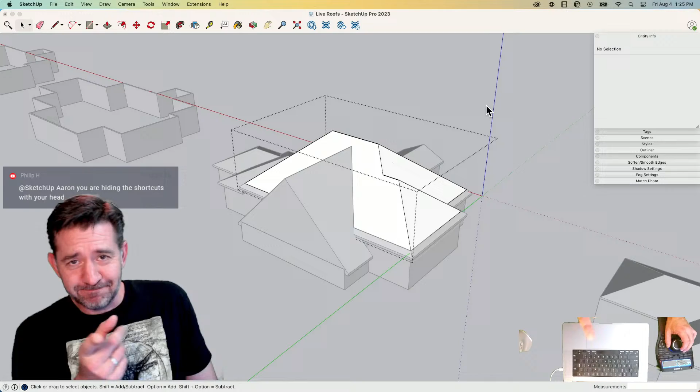Oh, must be Friday. You know, here's the problem: I'm on vacation next week, so everything's extra hard right now. Nice, you've already checked out.

Shift H, what was that command I just snapped 3 seconds ago? Oh boy, all right, there we go. H something. So when I'm out here not in context, I'm just in the general model, I can toggle that all I want. It doesn't change anything. But if I go into something and hit it, then I can switch it on and off. Good call. Thank you, Elmer.

Speaking of which, all right, so now I'm going to come in here. Like, what did I do? Why did everything go away? Command H to hide your current window, if you guys are ever looking for a fun shortcut to hit.

I'm going to grab all of this geometry, and I'm going to say intersect face with model again. That's going to give me breaks every place this geometry hits another piece of the roof out there. That's going to give me these lines right here, which is the most important part. That's what I want, just to be able to see that.

Now I'm going to take this one right here. I'm going to grab all that geometry, copy it. Actually, we can just cut it, that's fine. Come into context here, edit, paste in place. And now I can just run around and get rid of these pieces.

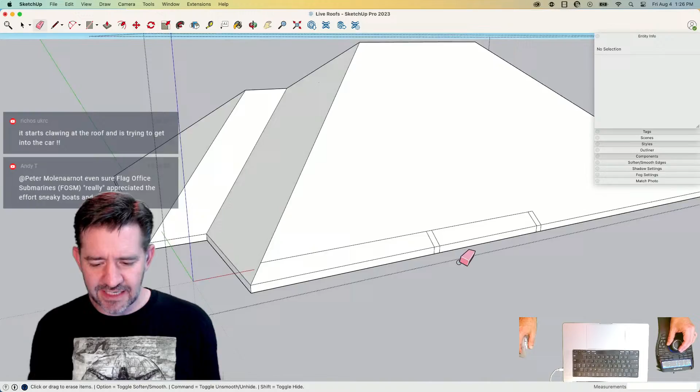This is kind of up to me, like how much more cleanup do I need to do. Do I want to go in and make it solid, or is all that's important that I get my lines there at the breaks? I guess that's up to you, I defer to you on that. But that's how I would put my overhangs in, like that.

All right, build it, frame it. I know I have these two other options. Or wait, hold on... well, that's all the models I was prepped for.

All right, I do want to show one other thing, because this is a roof that showed up all the time out here, and I don't know why this was so cool, but I'm gonna also return to the dormer thing. Because if you've got a roof and then you decide you want to add a dormer to it, sure, like what is a way? So dormers, all dormers really are...

We're gonna talk about a skylight too, I forgot about that. This is all a dormer is, that's where I was going with that. It's a little box that gets built up on top of the roof, and that box gets...

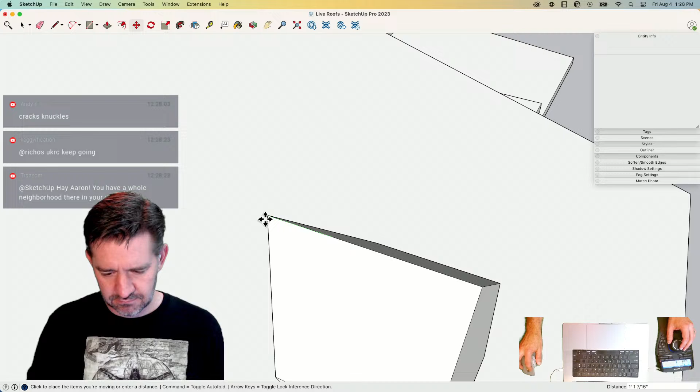Oh, I didn't see it. Peter also asked about a bell roof. I don't even know what that is, I've never even heard of that. Look that up. Oh, it's literally almost like a cupola, or it seems to be on top of... there we go, a roof resembling the shape of a bell. Oh, where it comes down and then goes out. Again, it could be round, multi-sided, or square.

And then at whatever distance it changes, so say this comes in for 18 inches, then we're going to break it right there. And then we're going to take this part and rotate it wherever that's supposed to be. So I'm going to put it back to flat, and then I'll rotate it up to 4/12. And then I can go find the middle... yeah, that gets me that profile. So take that.

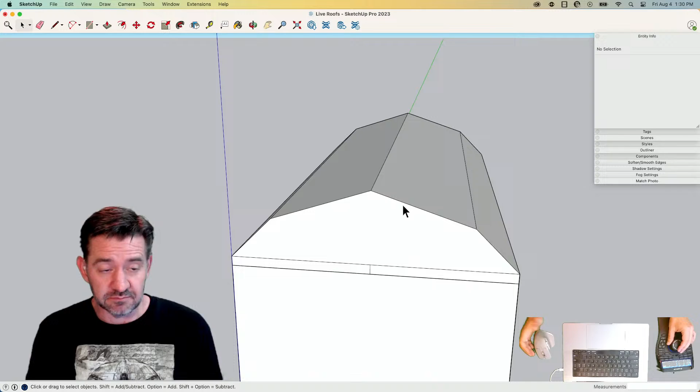So it's just a matter of, and then the bell is just the opposite. It's a lower pitch first and then a higher pitch second, like that. So really, again, get the line where you need it, get the surface where you need it.

Pretty simple. I know a lot of people when they get into roofs find it scary, right? Because it's a whole bunch of planes. That's where groups come in. Because as long as all the geometry you want to keep is in its own group, you can't mess it up. You can put 300 planes in and it's really not going to matter. Your surfaces are going to be able to cut later.

Same right here with this dormer, it's just a box on top of the roof. No big deal. But yeah, the other thing I just wanted to show, because this would drive me crazy, since we had so many of these.

I don't know why, but you'd see these kind of windows. Maybe this is just a popular mountain home thing, since I worked on so many of those. But we'd always get these weird little, not octagonal, but 45-degree sections, something like this on kitchen nooks all over the place. That constantly happened.

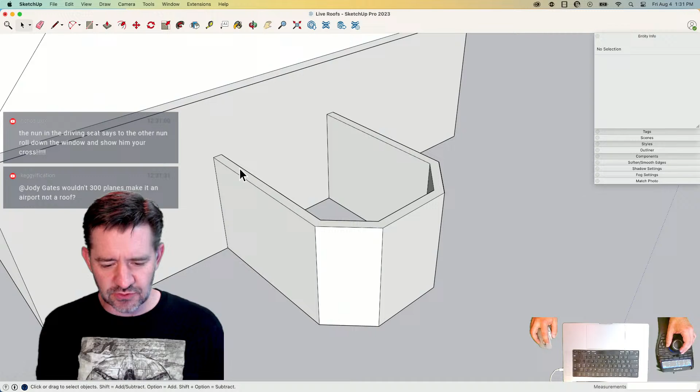So we'd see that. And now the thing about this is you can't do the same thing we were doing, because what happens if you put the same roof on these 45s as you put on the rest, they don't work. They don't end up in the same spot. So what you got to end up doing... I can't snap.

I got to call it. I forgot how to snap to points. All right, let's try that again.

So what happens here is I'll take this just like I've been doing. We'll just do 6-12 again. Midpoint here, bring that up. All right, so this is my shape here. So bring that out like this.

What you got to do is take this, put that right here, and then let's take this and flip that around. That's it. So, like, it's okay, make a mess, it's really acceptable. It's totally fine. Because even with this mess, I can pretty quickly take this, grab this edge...

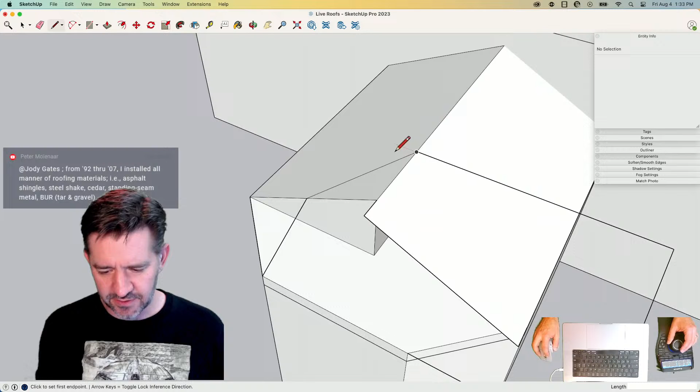There we go, find it. That would... no. Oh, all right, let's move you. I'm just gonna move you. What are you gonna say about that?

100 undo steps, as you said earlier. Yes, you can always screw up 99 times. Yeah, and then I just clicked on a wrong point again because I can't snap, apparently.

Oh boy, it's getting rough. We move from 'Aaron does cool stuff' to 'this isn't what you should do,' what not to do. All right, so it's just saying, look how easy it is to do all this. It really is not that hard.

Oh, I just missed a snap again. Am I just going fast? I'm just hurrying or something. I don't know. Okay, this all turned into a horrible, horrible mess.

I was going to show how easy it was to do this, and then it didn't end up being easy.

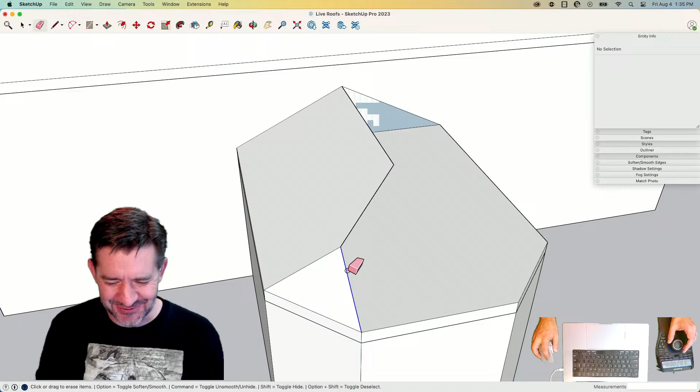So what you end up having to do in this situation is fake that this slope right here ends up being just a different slope. But it's really easy to do in SketchUp in the end, because all you need is that ridge point, and then you can just kind of snap around to those pieces there. Showing the difficulty in it was actually a lot harder than just showing the right way to do it. But then this overhang just snaps around there. Super easy.

Just to hop in real quick and go back and talk about what we were talking about with skylights. So all a skylight is, is a hole punched into a roof. So if I look at a roof like this, if I had it in as a solid, that would actually be the easiest way to do it. So I'm guessing I got some edges in here.

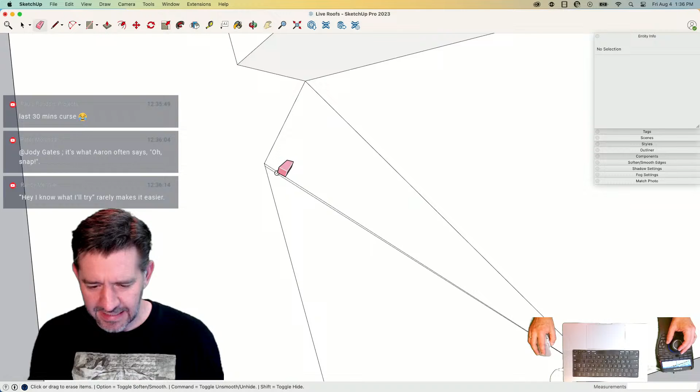Whoa, yeah, let's get rid of all this. One too many. Why are you not closed? Oh, that's why. Now it's getting messed up because you're not hitting points, you're not snapping to the right points again. I am a mess, it's all falling apart, everything. All right, and there's something inside of here, that's why. There we go, troublemaker.

Okay, now that is a solid. So I could do this with solids, because I come over here and say, okay, let's say I got a 24 by 36 skylight, pull that straight up. I could make that into a group, and wherever that is, I could punch that straight through. So this would work right here if this was more like a chimney, where I'm measuring that space. This is 24, this is 36, and it's going to intersect here.

The issue with a skylight is that this shape, right, this is my 24 by 36, this needs to actually be like this.

That becomes, it's not more difficult, but what I have to do at that point is drop that vertically to the bottom of the roof, make that into a new group. And then I could actually just take that geometry. If I want to make it a solid, I could do this. I could also just cut this right out of the roof.

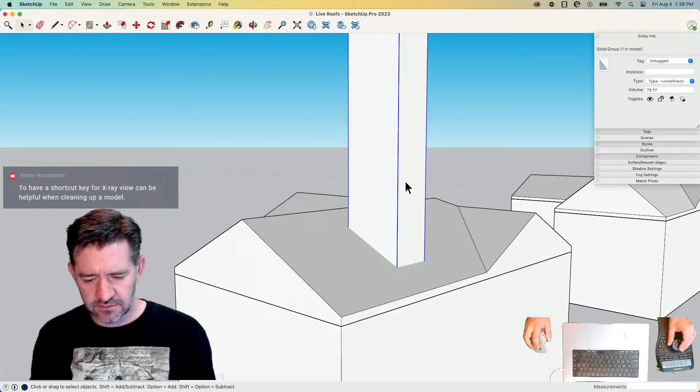Over here, this is my chimney. Drop that all the way down. That's supposed to stick up like that. Same thing, I could take that solid, I could go to tools, and I would use probably trim to cut it out of this roof. So then my roof, there we go.

There's different things too with skylights. Sometimes they taper, they flare out. So I could always come in here, grab these pieces, maybe scale that out from the middle to flare that a little bit. I'd have to clean up how this happens at an angle, but...

Really, again, simple geometry when you get down to it. Just a matter of getting those surfaces in the right spot, intersecting with each other, and making a more complex roof like that is not terribly difficult.

That feels like one of those projects, the type of project where I get in trouble whenever I'm working on something. I get in trouble when I start trying to do it the fast way instead of just being slow, taking my time. If you just break it down slow but steady, you'll get there. Break it down, small pieces.

It's just like learning SketchUp, right? This should not be the first house you model. This shouldn't be the first house you model. Well, this shouldn't either, the one I did before that I got rid of. Start simple and work your way up. Don't start with the most complex thing, just take it one step at a time. Break it down into small steps.

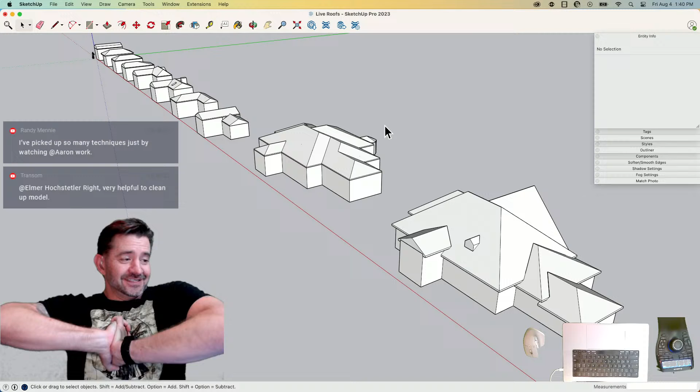It might be time for you to go on vacation. Sounds awesome. Are you gonna go somewhere? No, I'm just gonna stay here and not do stuff. Nice, that's my dream vacation. Just don't work. Well, the good news is it'll probably rain in the afternoon on whichever day you're doing it. Odds are not good. That's how we roll here in Colorado.